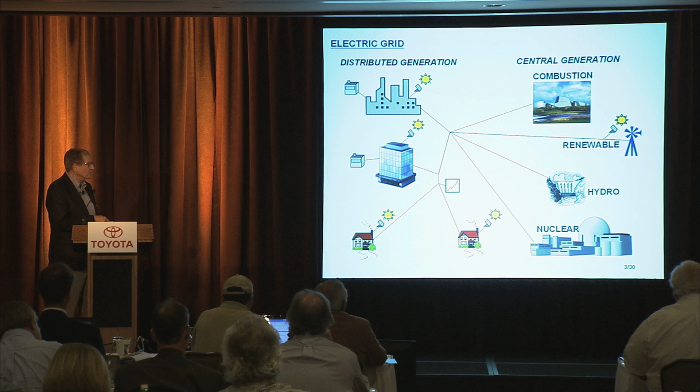We're now seeing other technologies come about, particularly to handle this perturbation of electric charging and intermittency of renewables, and that's electric battery storage, just in the area of its infancy in being considered and deployed into the electrical grid. And we call those distributed energy resources.

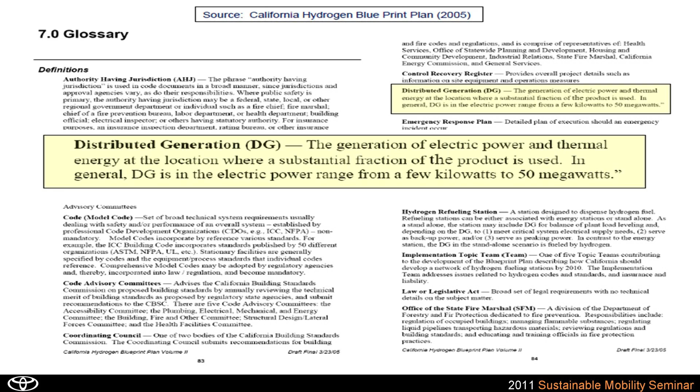What is distributed generation then? This is the area of application, and this is a glossary which you can read clearly from Governor Schwarzenegger's California Hydrogen Blueprint. You can see a lot of different items here that are being defined, but over here you see distributed generation, and if you blow it up, it basically says that distributed generation is the provision of electricity and a thermal product at the point of its use up to and around 50 megawatts of generation.

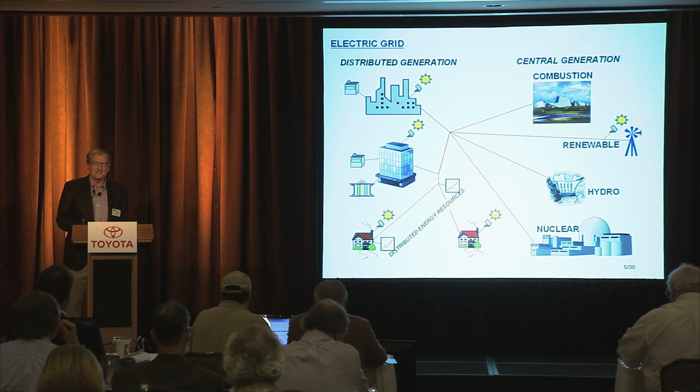So we come back to our map, we see solar and microturbine generators populating this space, but we're also now seeing the emergence of another technology right here, for example, and that's the stationary fuel cell. So let's talk a little bit about the stationary fuel cell. Among its attributes would be a high fuel to electrical conversion efficiency. Right now, with the advanced stationary fuel cells, that's 50% and going north rapidly.

It's also a technology with a high quality heat product for good thermal capture. It is acoustically benign, meaning it's quiet. And it's virtually zero emission of criteria pollutants, some pretty remarkable attributes, if you will. And then it turns out to be a fortuitous fit right now in what is being demanded in the community. For example, distributed generation, it's a nice fit.

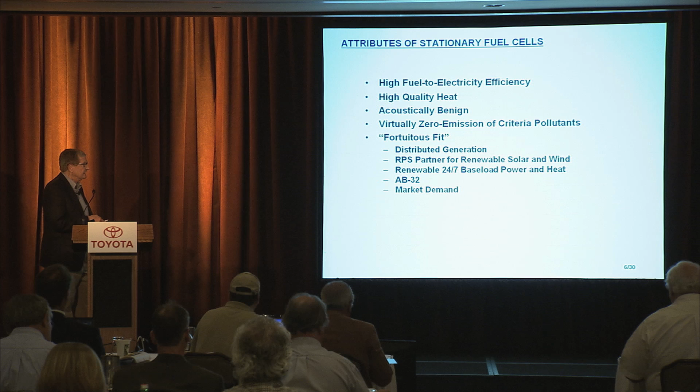For example, a good partner for the Renewable Portfolio Standard, RPS, in order to kind of buffer this intermittency that I alluded to. And then it itself, if operated on a renewable gas, is a 24/7 generator of renewable electricity. It's a very fine technology to be evolving to handle the California directive under AB 32, the mini Kyoto for California. And the market is starting to see the attributes and beginning to cry out for the technology to be deployed.

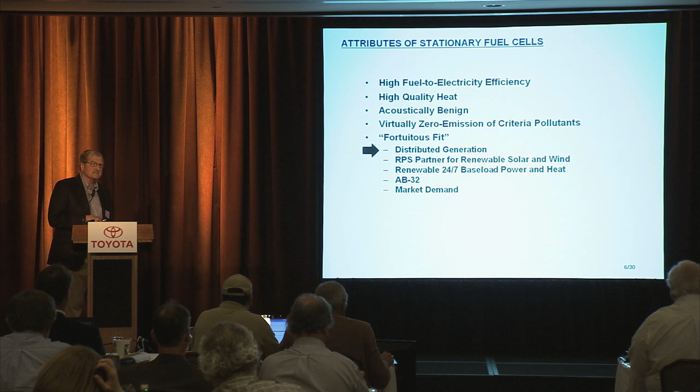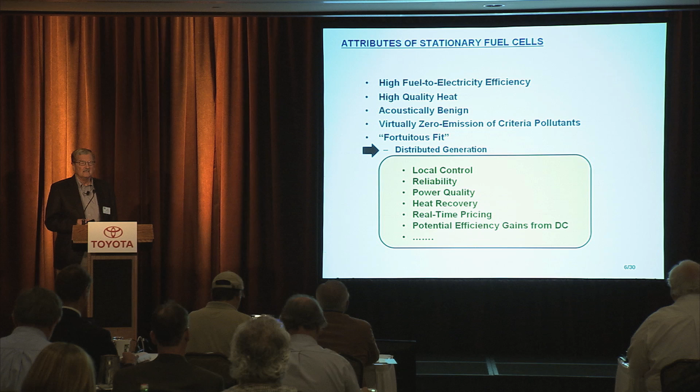Now we're focusing here on distributed generation, so in that spirit, let's just talk a moment about why distributed generation is garnering popularity. The first word you see here is local control of the customer, of not only relying upon the grid, but having another resource that the customer can depend upon to assure sustainable electricity at their site. That really leads to this label of reliability.

We're finding the customers becoming more interested in power quality, kind of avoiding those voltage sags that we see that kind of give a hiccup to our computer and eat away at the lifetime of the computer. The opportunity for heat recovery, or what we call CCHP, combined cooling, heat, and power, to take that heat and rather than exhausting it to the atmosphere, to recover it and use it for a purpose such as air conditioning.

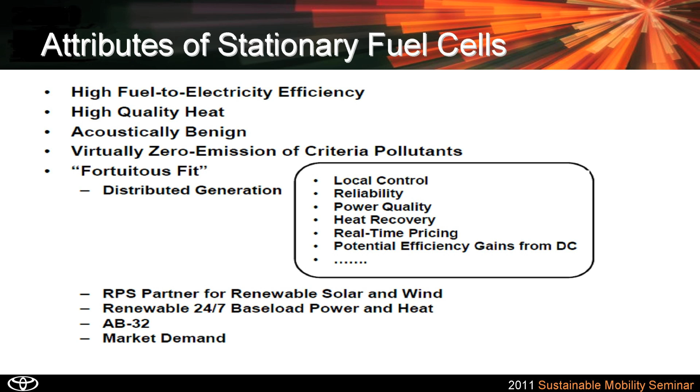Real-time pricing to bring a lower cost of utility bills to the customer. And something that's really intriguing here, I'll just whet your appetite with it, but it's the potential efficiency gains of utilizing DC in the built environment.

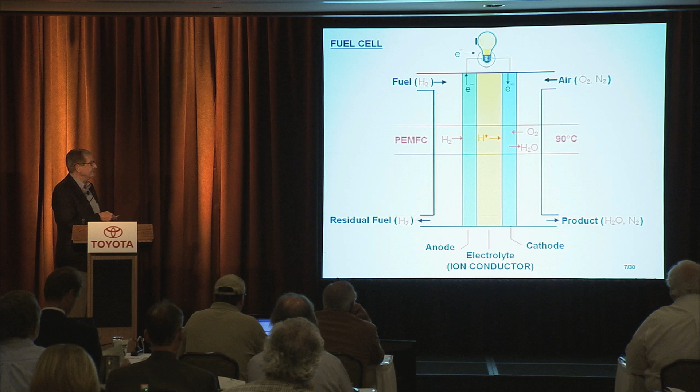An example of this is a fuel cell called the proton exchange membrane fuel cell, and its temperature of operation is 90 degrees Celsius. And those two characteristics really differentiate the different types of fuel cells. I'm going to show you 4 different types here because they're part of our future. I want you to appreciate what we are facing. The first one, beyond the proton exchange membrane fuel cell, would be the phosphoric acid fuel cell. It has the same chemistry as the proton exchange membrane fuel cell, but you can see it operates at a higher temperature, about twice as high.

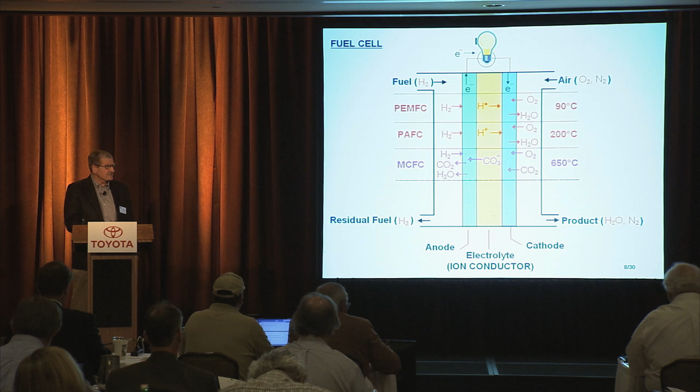And then we have the molten carbonate fuel cell. It has a very different chemistry. In fact, not the proton, but the ion is transported from right to left. And of course, the temperature you can see here is quite a bit higher than the first two that I identified on the chart. The fourth type is solid oxide, which again has yet a different chemistry. You can see that here, and an even higher temperature.

So let's just go through this list and look at the applications. Let's start first with the proton exchange membrane fuel cell, and our application will be, of course, the automobile, because that's the type that's selected for the automobile. There it is, the automobile power plant under the hood that was just described by Dr. Thomas, with hydrogen going to the fuel cell for the fuel, air coming from the right for the oxygen, producing a DC current, and an exhaust made up of water and the nitrogen that came from the air.

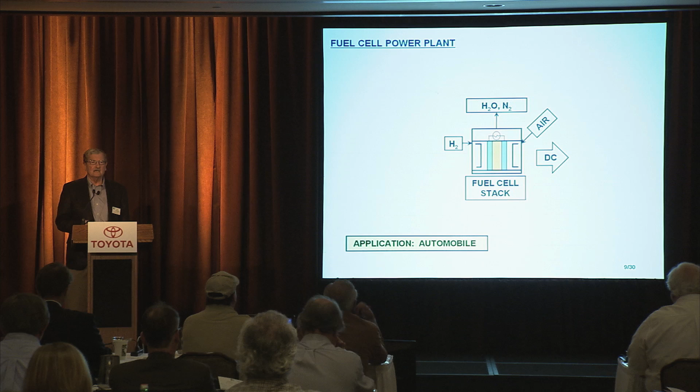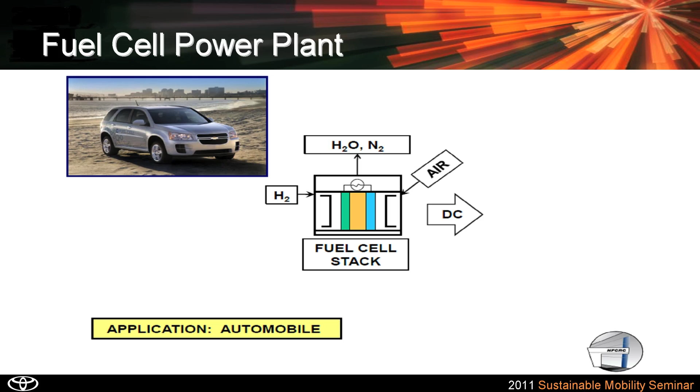And so an example of this is a General Motors Equinox, but you have the opportunity of seeing the FCHV out here and actually driving it as well. And I think we all know we have Honda, Nissan, Hyundai, and many others evolving this concept.

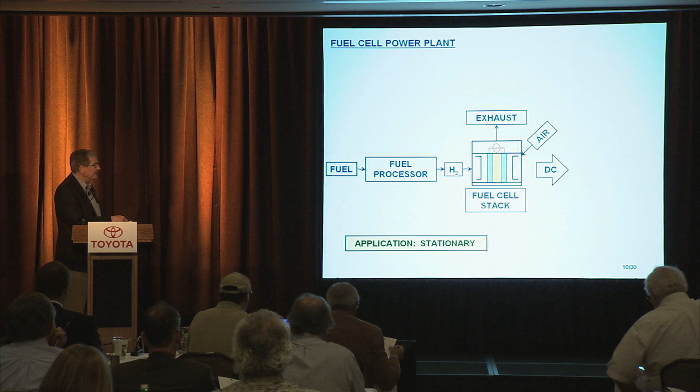But we're here to talk about distributed generation, which doesn't move. So let's go from the automobile and go to the stationary application. And for that fuel cell, we've got to do something here on the left side. We've got to take a fuel like natural gas and go through a fuel processor in order to extract out the hydrogen. And over here on the right, we can't really use DC today, so we invert that to AC in order to be compatible to the built environment.

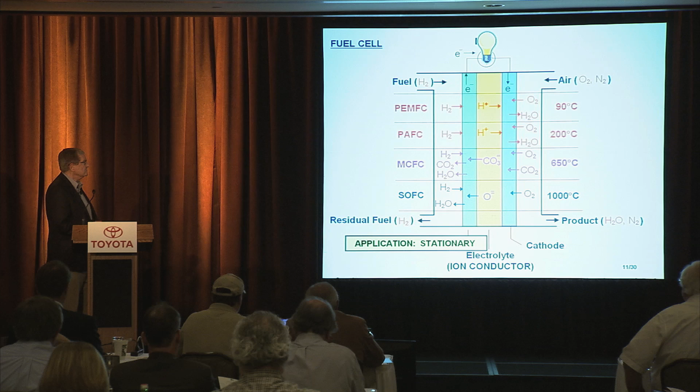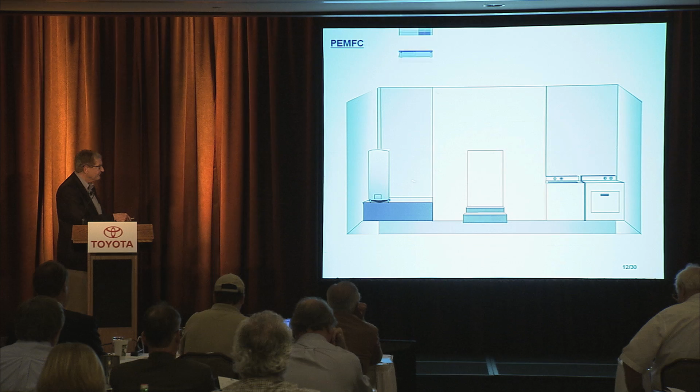Where does that come into our future? Well, let's start here with the proton exchange membrane fuel cell. Where that's coming out is right here in your home. This is your garage. May not recognize it, but here's my depiction of a washing machine and dryer, a water heater, and I've left some space right here for your fuel cell. There it is, right there, a 5 kilowatt fuel cell.

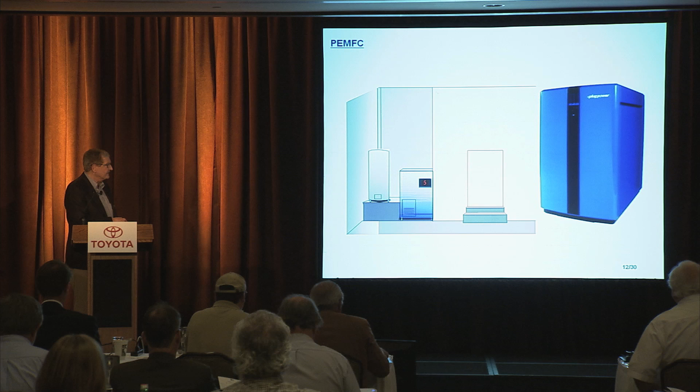And lo and behold, we have a manufacturer that's beginning to think about deploying this commercially. That's Plug Power in New York, not quite this size as I had hoped, a little bit bigger. And then there's a company in Oregon, Clear Edge, that is actually commercially deploying this today in California, primarily in the Orange County area. So this is beginning to take hold in the commercial market.

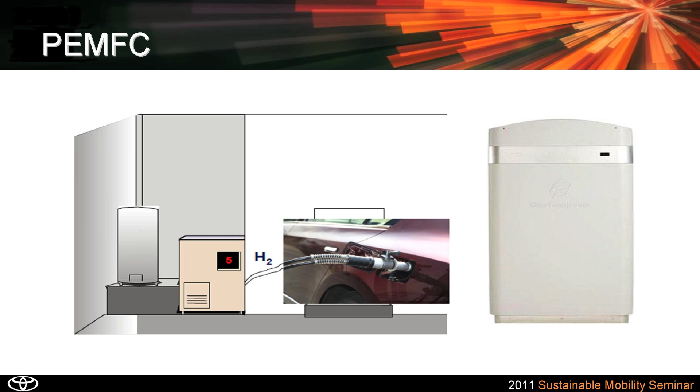If we look a little bit further out, this morning we're talking about natural gas fueling in the garage. There is the consideration of fueling not with natural gas but with hydrogen in the garage, converted through the reformation through the fuel cell. If we think a little bit further out than that, we can look at the house of the future, which has photovoltaic on the roof. Well, of course, homes do today. Fuel cells, we're starting to see those coming, but this is a special type of fuel cell. We call this a reversible fuel cell.

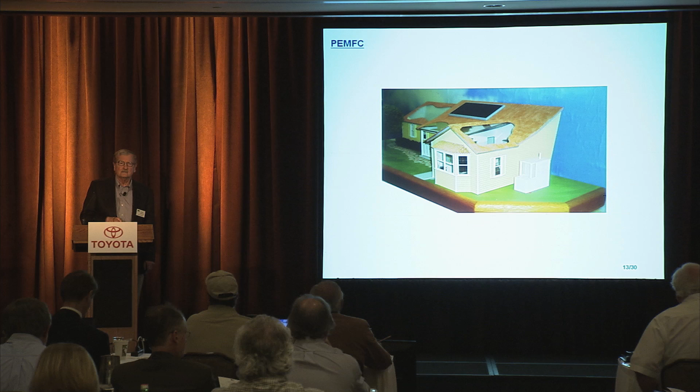So you need to think of the day, the sun is out right now, and the photovoltaic is producing electricity for the home, but it's also taking some of that electricity because you're not at home and sending it to the fuel cell, which is taking the water absorbed the night before and electrolyzing it to hydrogen and oxygen. And then at night, that hydrogen and oxygen is used to provide electricity back to the house. But there's a reserve of hydrogen that then can be used to provide fueling at the home.

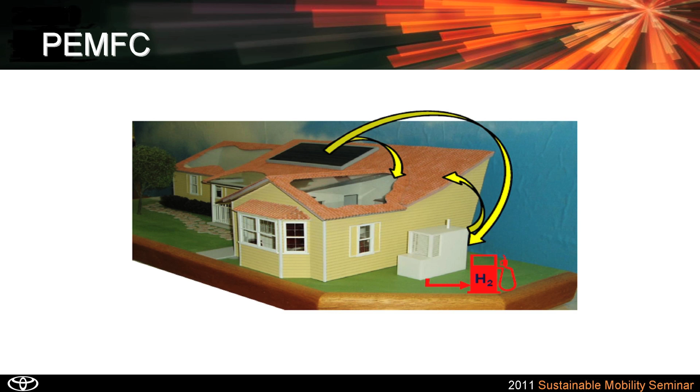So this is really an interesting concept. This is not grid connected with electricity, not infrastructure connected with the natural gas. It's a regenerative, renewable, non-fossil fuel, sustainable, if you will, production of electricity, heat, and transportation fuel for the home.